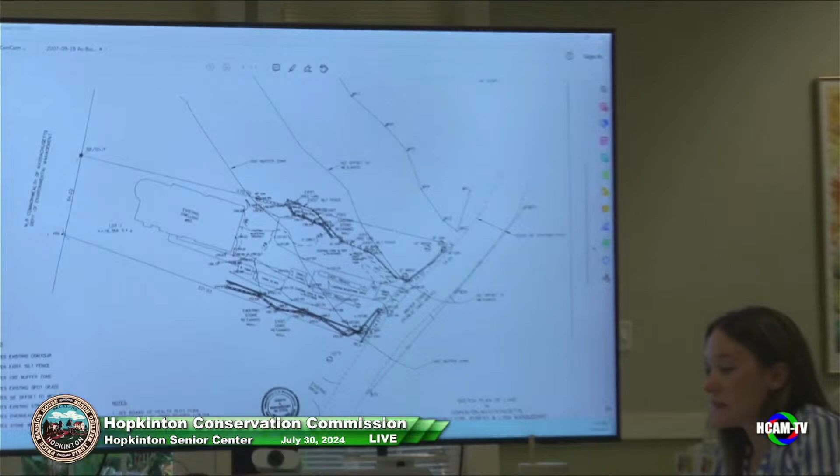All right, I'll talk you folks through this one. We have a certificate of compliance request for 80 Winter Street. There was a notice of intent in 2004 to raze an existing single-family home and construct a new single-family home with a septic system in its place within the buffer zone. The COC was originally applied for in 2007, and the previous conservation consultant, Ellen, I don't know if any of you remember Ellen, she reviewed the site back in 2007 and noted that the site was stable, it was built according to the plan, and they were only waiting on some additional PIBs.

And then I guess the ball got dropped. So it just recently came up in a title search because the property is changing hands again. So we did have an as-built, and we had the fee, and we had the review.

So Anna and I decided the best course of action was to go out to the site to check if the as-built was still accurate. We found that it was still largely accurate, and that we were just missing the last little bit of PIBs. So we advised the homeowner and applicant to install additional PIB medallions at the site as originally approved, which they did. At this point, I am recommending the Conservation Commission issue the certificate of compliance.

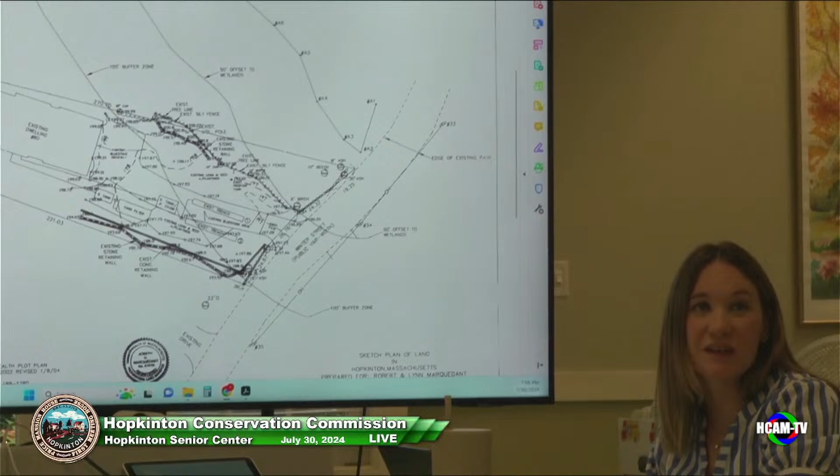Melissa: I'll make a motion that we issue that certificate of compliance. Anyone have any questions? No? Okay, can I get a second? Second. All in favor? Aye. Aye.

So we'll move to the new hearings, and I will read this.

Hopkinton Conservation Commission will hold a public hearing on Tuesday, July 30th, 2024 at 7 p.m. at the Hopkinton Senior Center, 28 Mayhew Street, to hear all persons interested in a notice of intent filed by Hopkinton DPW for drainage improvements and associated site work. Location: Wood Street, right of way from Walker Street to the Indian Brook Culvert at 83 Wood Street.

Hello everyone. So, Kerry Reed, Director of Public Works. This is Peter Barozzi with VHB.

So we came informally, I think, and talked to you guys about this one. Now we're submitting a notice of intent. We first tried the RDA with this, and then we were asked to go back and provide a full NOI submittal. We've done that. We did not receive any comments back from Lucas Environmental, so we're going to request to continue to the next hearing for full review. But if anybody has any thoughts or things they'd like to discuss, we can.

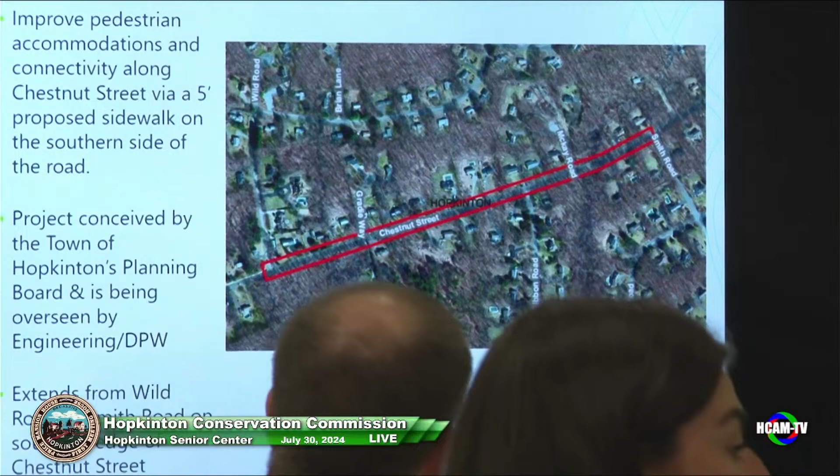The main goal of the project, as Kerry said, was to improve pedestrian accommodations and connectivity along Chestnut Street via the addition of a 5-foot wide sidewalk along the southern side of the road. It was conceived by the Town of Hopkinton's Planning Board and is being overseen by the Engineering and Public Works Department. It extends from Wild Road to Smith Road.

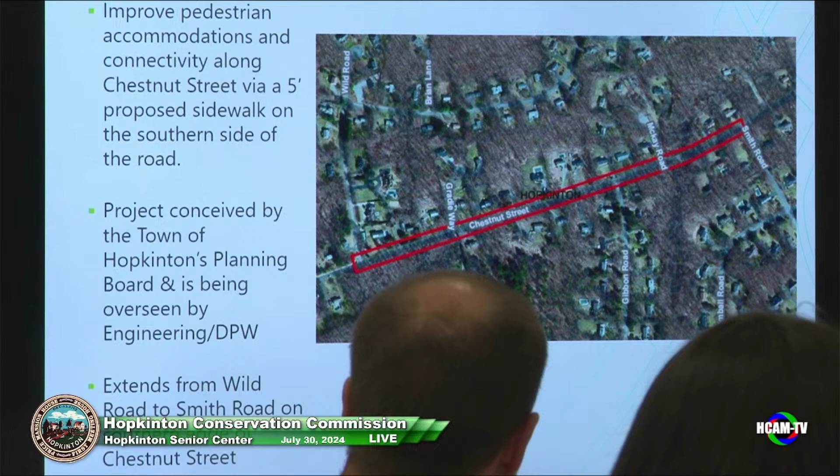Within the vicinity of the project, we have some wetland resource areas, including Beaver Brook, which flows north to south in the project limits. This is categorized after public review, or the peer review, we deemed it intermittent. It's mapped as intermittent on the USGS, and the drainage basin size on StreamStats suggests that.

We also have 2 smaller intermittent drainage and bank features along the project route further east, which support bank. We have bordering vegetated wetlands along these drainage features, and land under water bodies and waterways within the intermittent channels, and the 100-foot buffer zone as regulated by the Wetlands Protection Act, and the Town of Hopkinton Wetlands Protection Bylaw also instills a 50-foot no disturbance zone and a 75-foot no build zone from the edge of these resource areas.

And a little overview of construction. As we said, the construction is going to be split up into 2 segments. The proposed sidewalk will be installed on the southern shoulder of Chestnut Street. The adjacent roadside shoulder will be graded. The 5-foot wide concrete sidewalk will be installed with a 6-inch granite curb. And portions of the sidewalk will have a steel guardrail, I believe from Gibbon Road to Smith Road on the eastern portion of the project route.

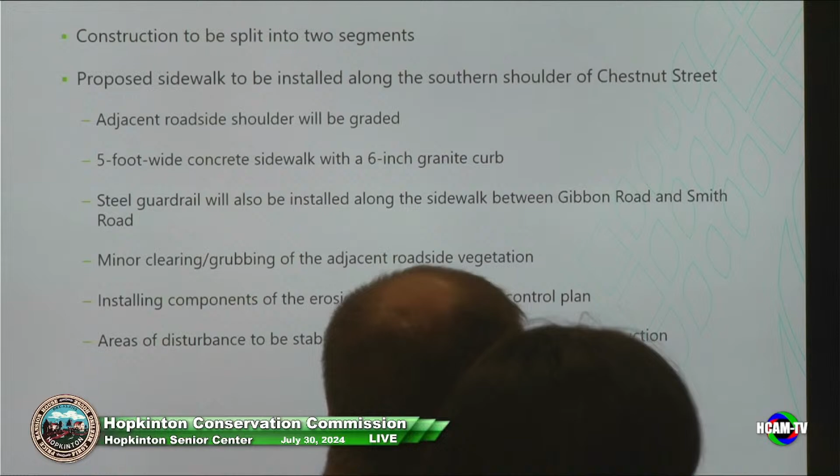The project also includes minor clearing and grubbing along the adjacent roadside vegetation, which is commonly mowed and maintained now. We are installing components of the erosion and sedimentation control plan in between the work area and wetland resource areas, and areas of disturbance that are not occupied by the new sidewalk are going to be seeded with a natural seed mix.

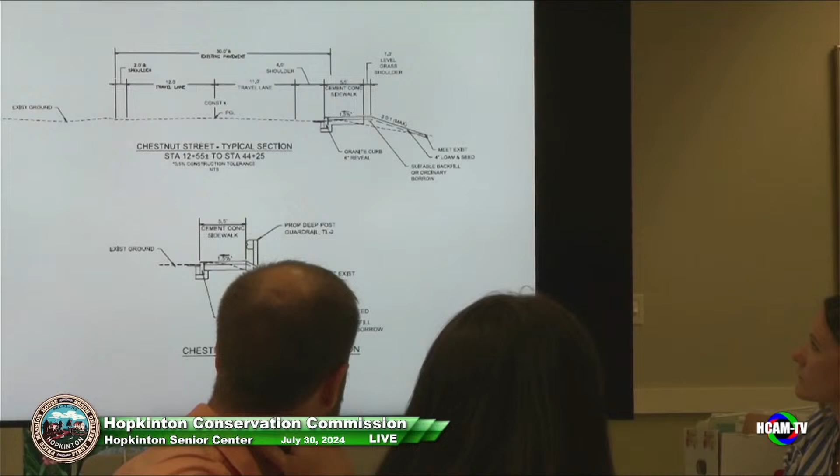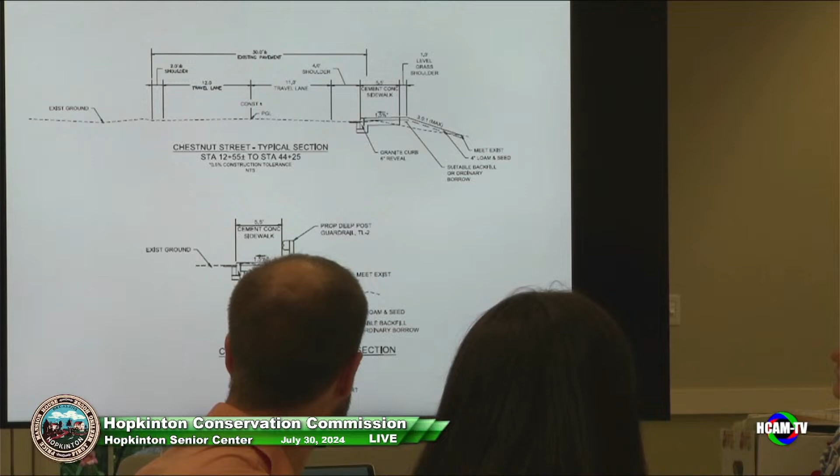So these are just 2 cross sections. The first one shows Chestnut Street, and on the right of the top photo, that's the proposed sidewalk, facing, I believe, east. The bottom one zooms in further to the sidewalk, and it has the proposed guardrail there too, showing the slope going down to the surrounding areas.

So work is limited to the 100-foot buffer zone and the locally regulated 50-foot no disturbance and 75-foot no build zones.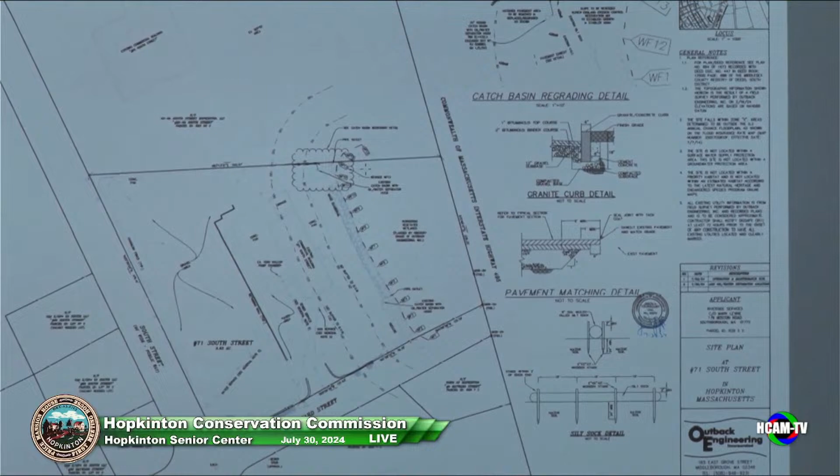Based on our last meeting, we have the letter here addressing our comments. Kim, you got the plan? This is the landscape plan. I believe we changed the trees based on the last comments, and identified the outflows and the drain structures. Yes, let me pull up my notes. And we adjusted the flag on the last one as well.

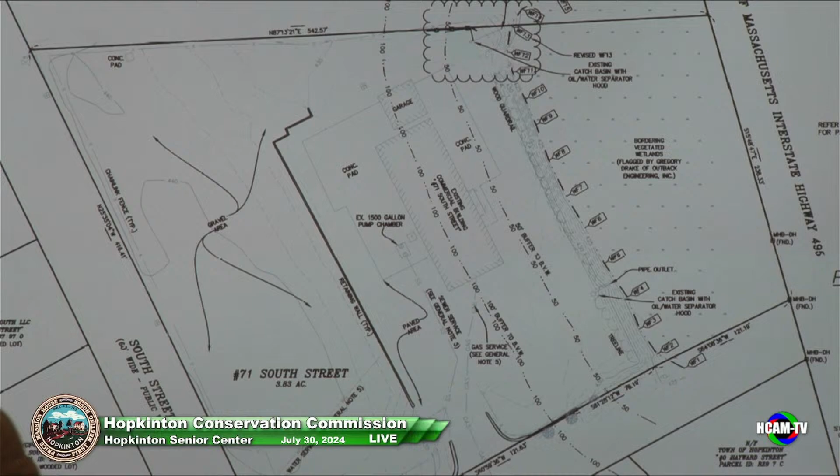So we have had several meetings looking at this application. At our last meeting, the last couple of items for the applicant to address, according to my notes, was for the outlet and pipe connections to be shown on the plan, along with the oil and water separator, and identifying which catch basins were deep sump hooded. We asked for an operations and maintenance statement to be added to the plans, and we also talked about how some of the plantings were still non-native.

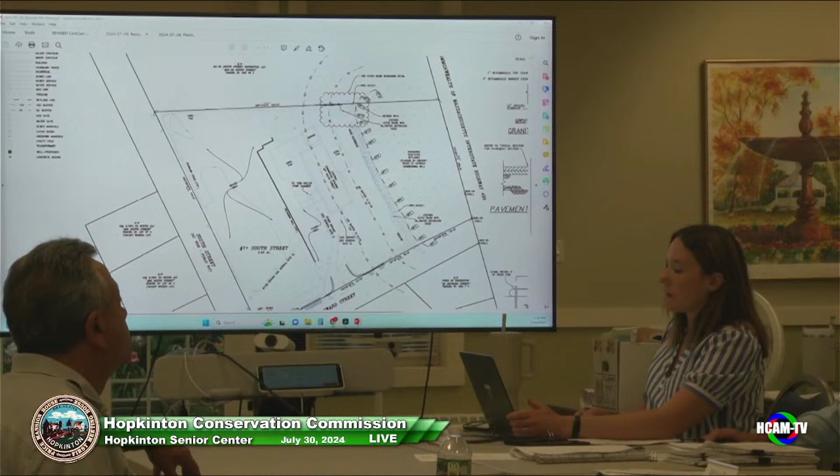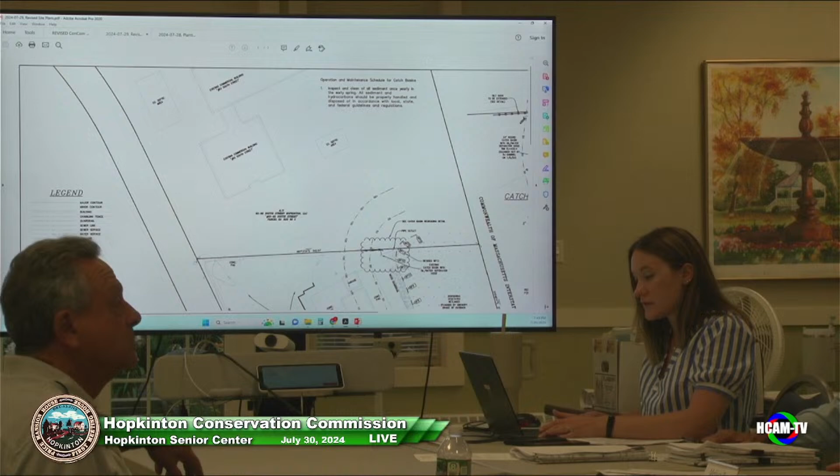At this point, the applicant has provided comments back. They have added the existing stormwater infrastructure to the plans. They've added labels for the catch basins that are deep sump and the catch basin that has the oil and water separator. I believe there is an operations and maintenance schedule for the catch basins, which really is the only BMPs on the site. And the plantings have been changed. Norway spruce is going to be swapped for shagbark hickory, and the English oak is going to be swapped for eastern serviceberry. So I think we have checked everything we have asked for.

Okay, yeah, I was looking at the plan earlier and was coming to the same conclusion, Kim. The species of trees you are comfortable with, you said, yeah. Does anyone have any questions or comments on this revised plan that we're presented with?

My only comment would be the apparent love for bittersweet. Yeah. Bittersweet is an invasive plant that's taking over half of the town, and to show it some affection and say that we want to leave it there just leads to the further spread of the stuff. And having spent more time than I want to talk about in the last couple of days ripping bittersweet out of the ground. We do remediation on a regular basis, we get paid to remove it.

So there's a lot of bittersweet there, and it's being left? I believe it was not to disturb the old retention basin or whatever, what was previously shown as the swale, but we're not touching that anymore, right? It was noted not to disturb the soil because it was embedded into the soil. Okay, and now the plan was updated to show that there's not a swale as part of the drainage system. We thought it was a swale, but it actually wasn't. Yep. So they're not working in that area, Ed.